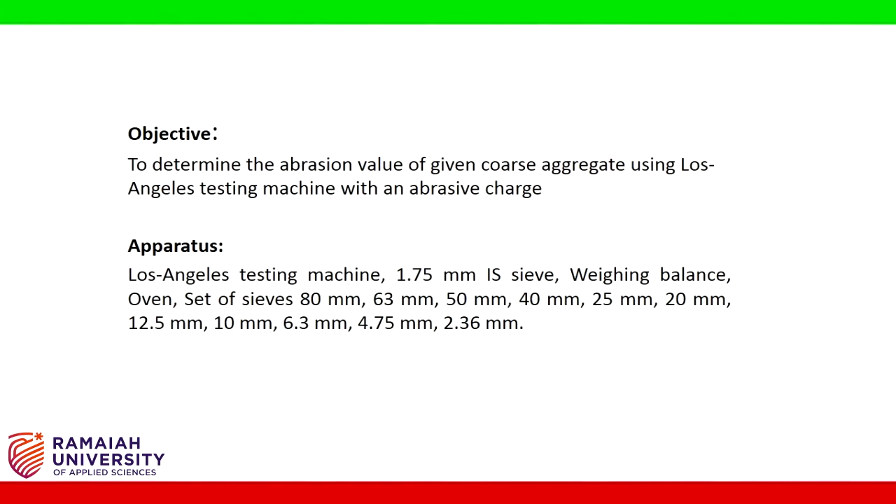2.36 mm. The principle of the Los Angeles abrasion test is to find the percentage wear due to the relative rubbing action between the aggregate and the steel balls used as abrasive charge. Pounding action of these balls also exists while conducting the test.

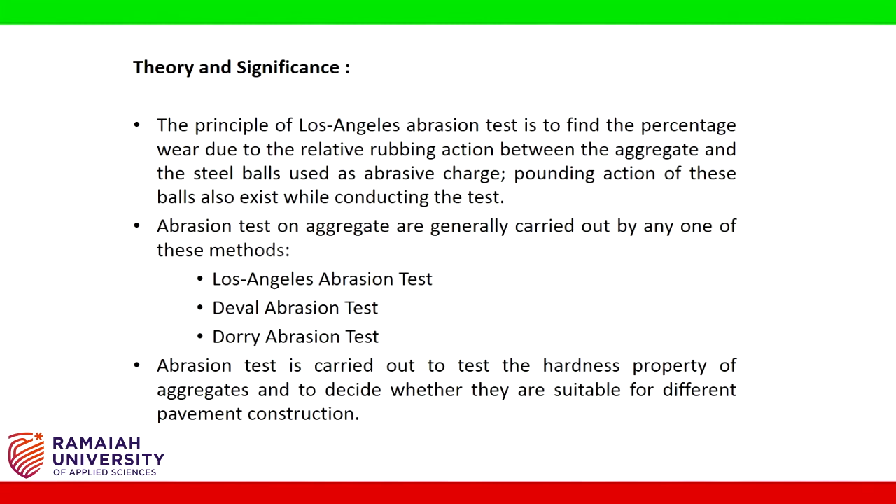Abrasion tests on aggregate are generally carried out by any one of these methods: Los Angeles abrasion test, Deval abrasion test, Dorry abrasion test. The abrasion test is carried out to test the hardness property of aggregates and to decide whether they are suitable for different pavement construction.

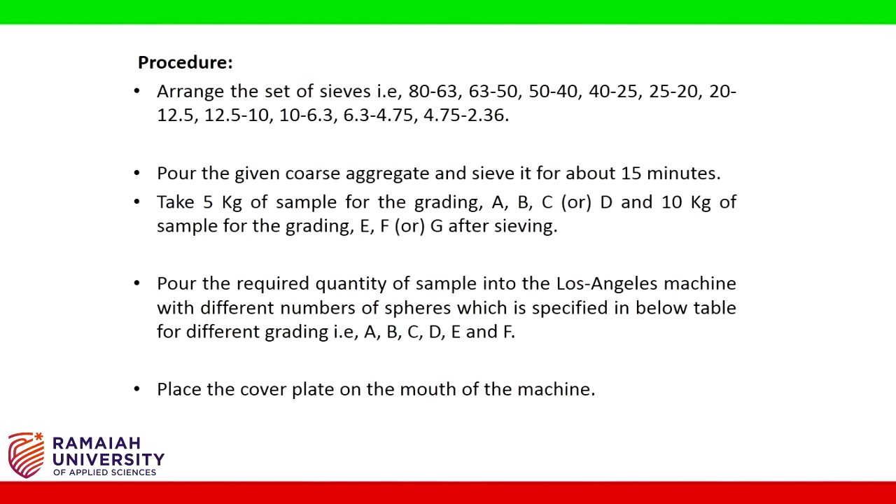Pour the required quantity of sample into the Los Angeles machine with the different number of spheres specified in the table below for different gradings, that is A, B, C, D, E and F. Place the cover plate on the mouth of the machine.

The machine is rotated at a speed of 30 to 33 revolutions per minute, for 500 revolutions for grading A, B, C or D, and 1000 revolutions for grading E, F or G. At the completion of the required revolutions, discharge the material carefully from the machine into a tray.

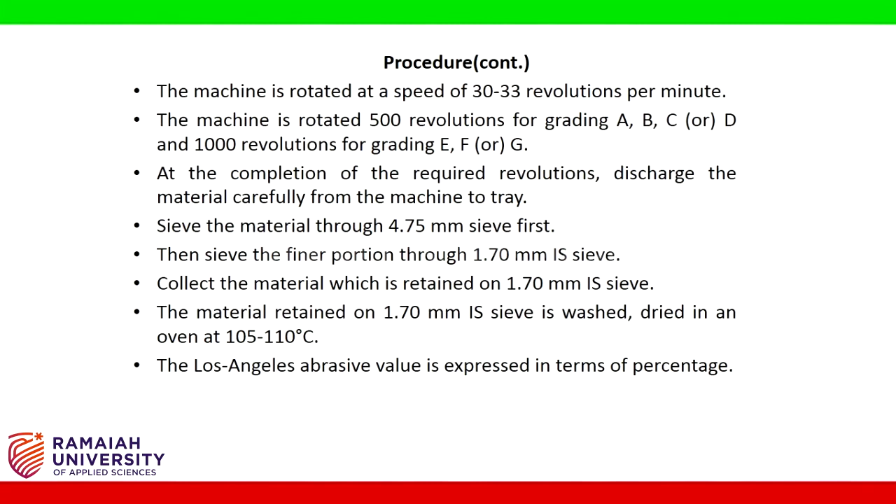Sieve the material through a 4.75 mm sieve first, then sieve the finer portion through a 1.7 mm IS sieve. Collect the material retained on the 1.7 mm IS sieve. This material is washed and dried in an oven at 105 to 110 degrees Celsius.

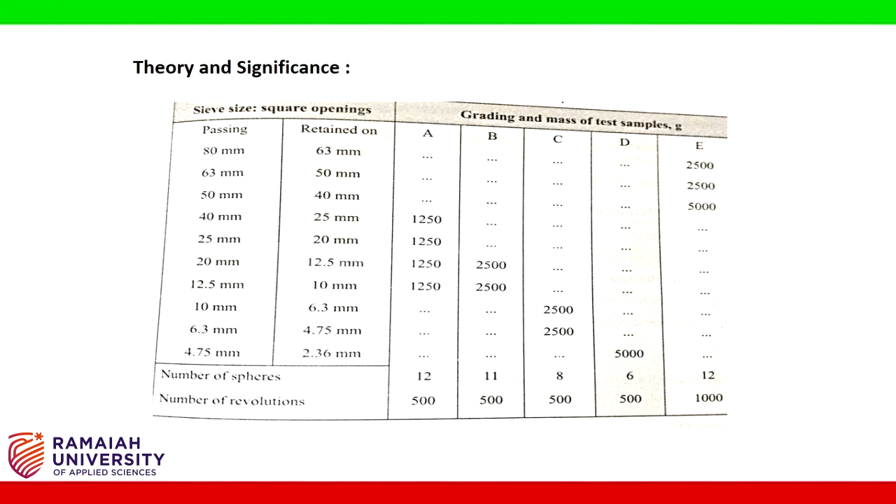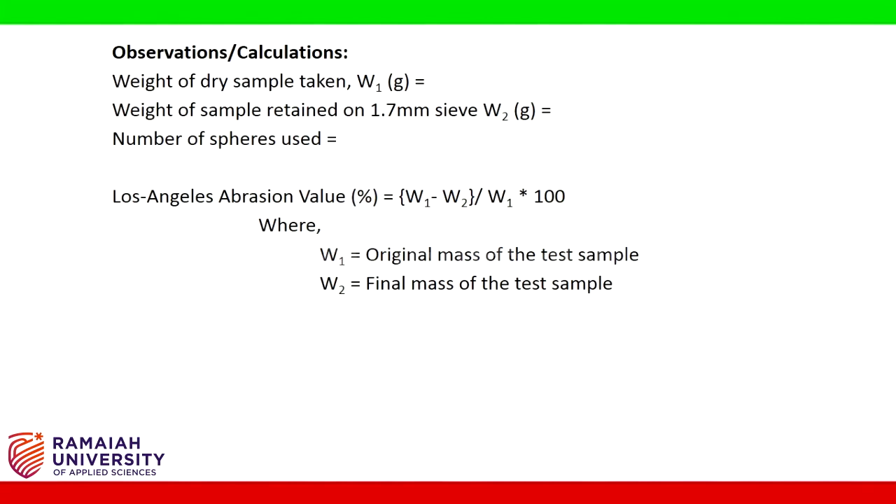The Los Angeles abrasive value is expressed in terms of percentage. Observations and calculations are made in terms of weight of dry sample taken, weight of sample retained on the 1.7 mm sieve, number of spheres used, and the Los Angeles abrasion value in percentage.

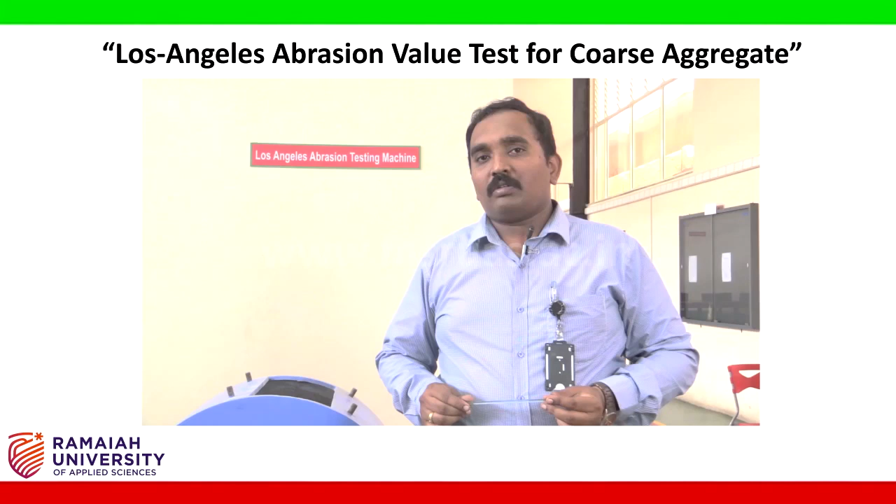Hi students, today we are discussing an experiment on abrasion testing of aggregate. So what do you mean by abrasion? The wear and tear action of the aggregates, we call it abrasion.

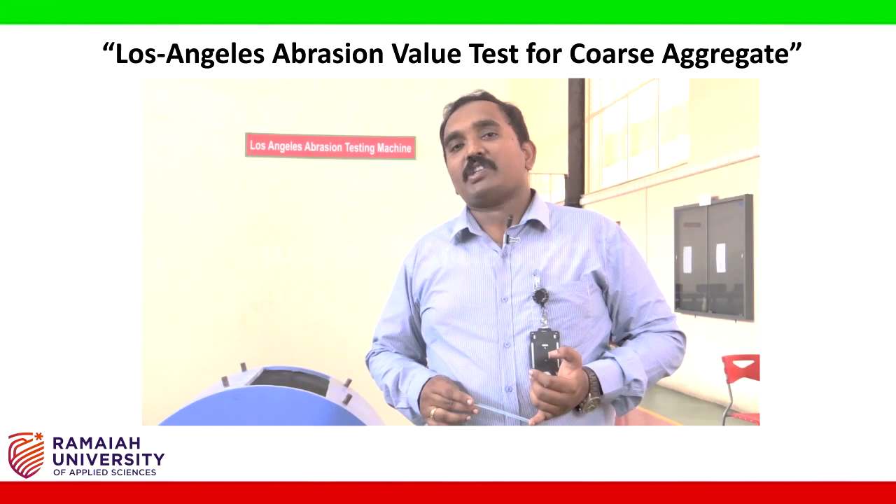As per standard practice, there are 3 methods of doing the abrasion test on aggregates. The first method is the Deval's abrasion testing machine, the second is the Dorry's abrasion testing machine, and the third is the Los Angeles abrasion testing machine. Let us look at all 3 types of abrasion testing machines and I will tell you which is the standard method and how to do it.

So as we discussed, this is the first method, called the Deval's abrasion testing machine.

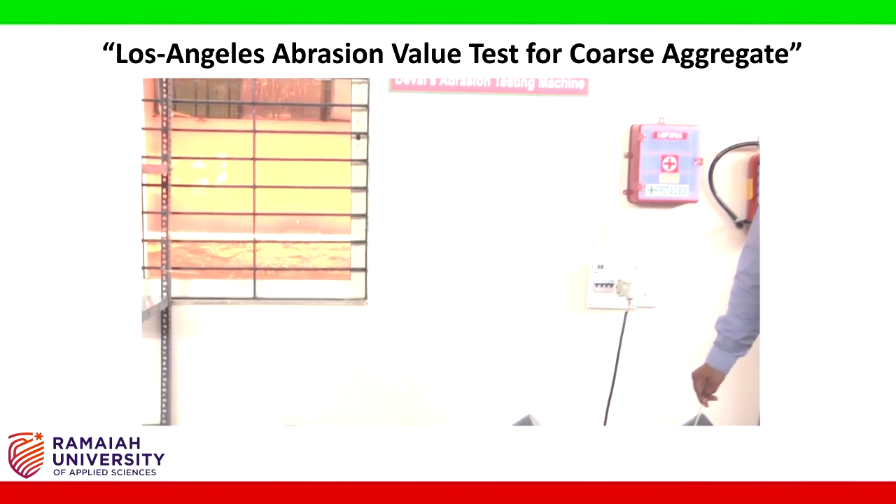So this is the second equipment, called the Dorry's abrasion testing machine.

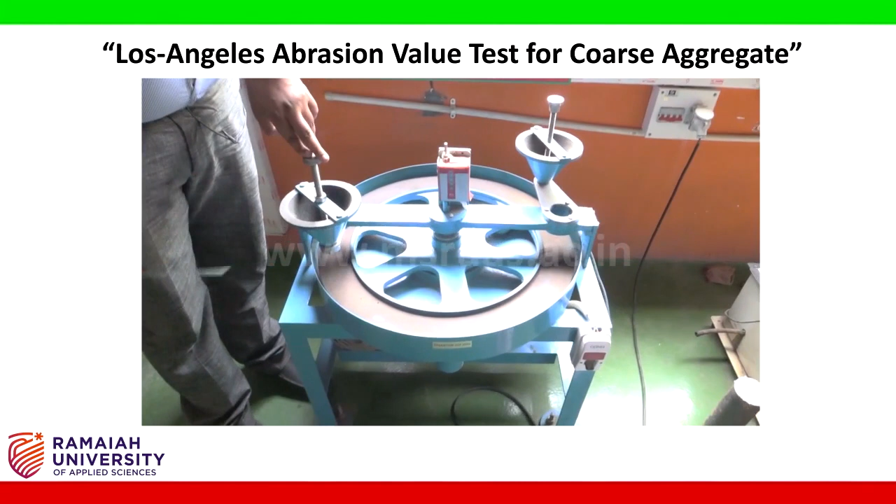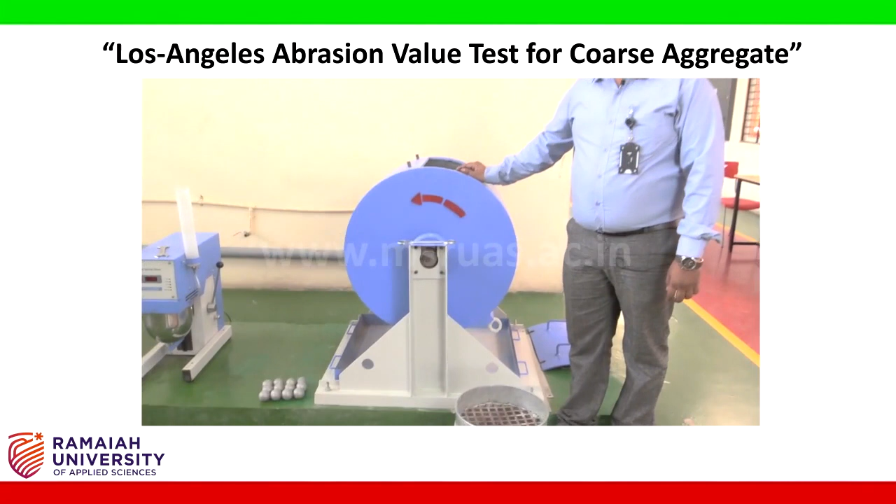The third experiment, the Los Angeles abrasion testing machine, is the standard method we are going to use in the laboratory today. So let me explain the apparatus required for doing this particular experiment.

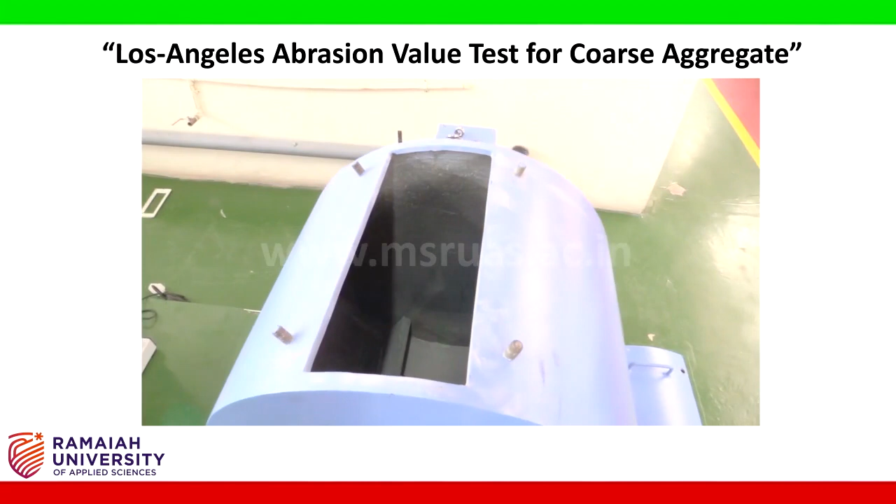This is what we call the Los Angeles testing machine. It has a cylindrical drum with one open lid, and if you keenly observe, it has a diameter of 0.7 meters,

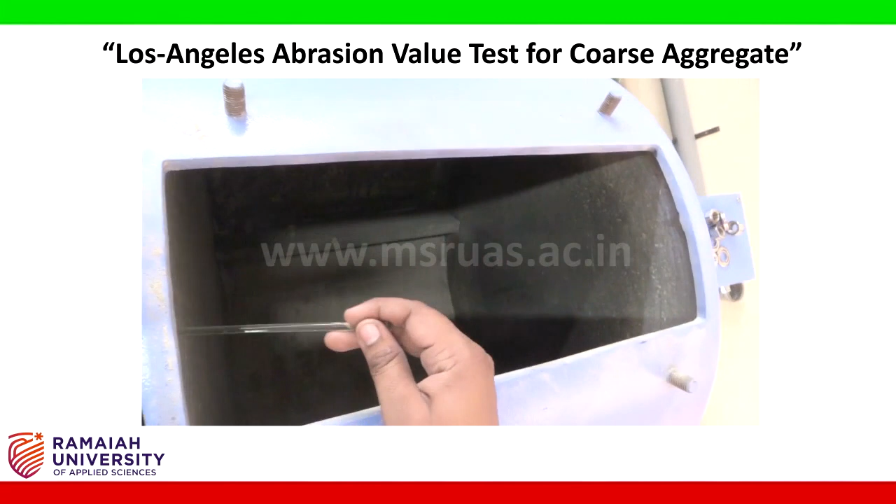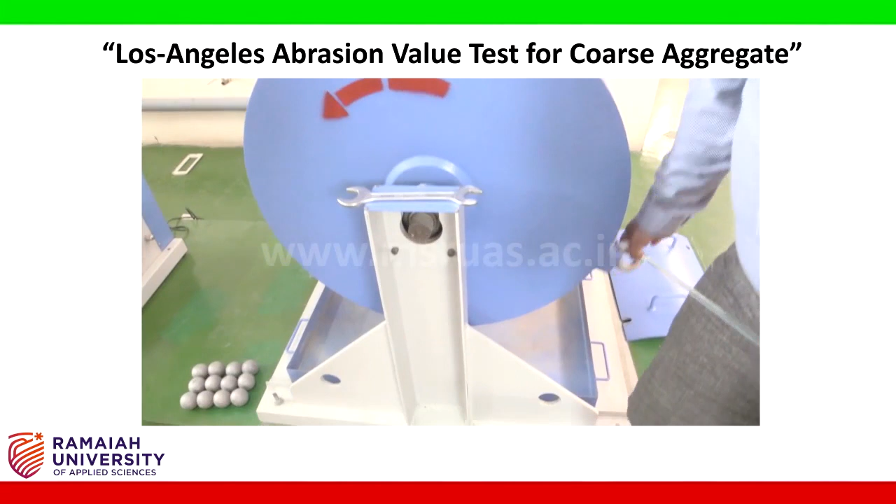and it is capable of revolving in the anti-clockwise direction. You can revolve this in the anti-clockwise direction.

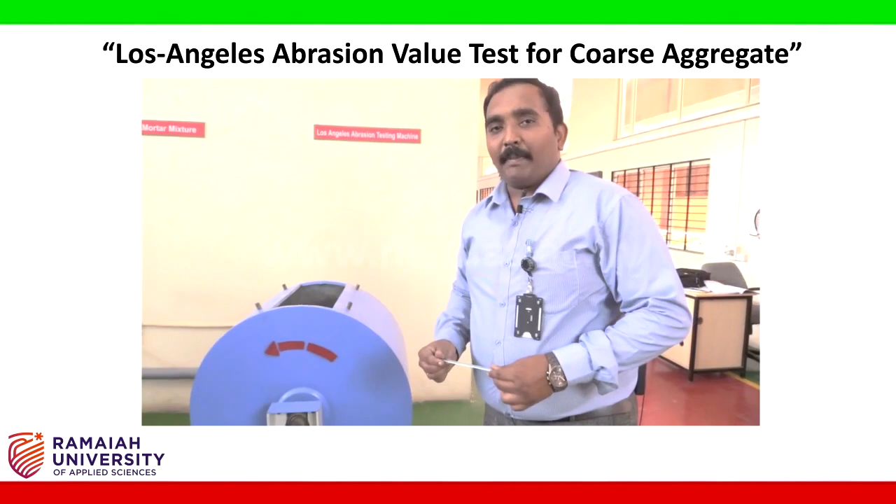Coming to the apparatus required, we require IS standard sieves of size 20 mm, 12.5 mm, 10 mm, 1.7 mm, and pan.

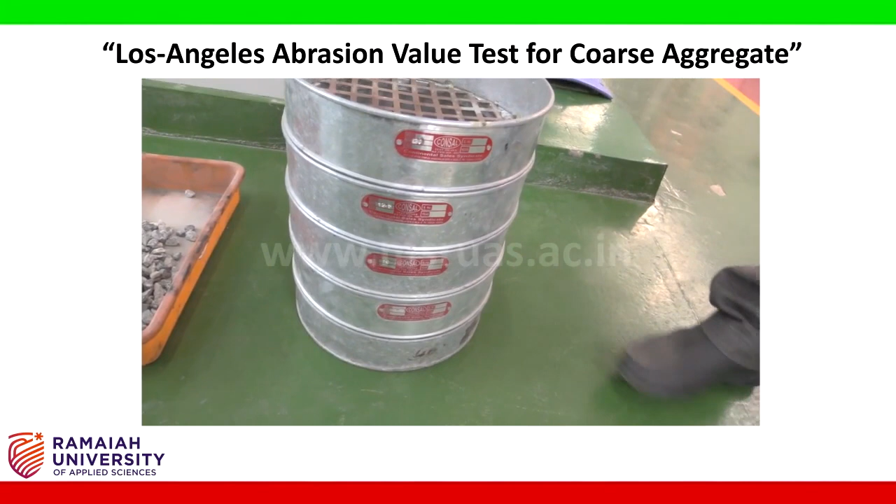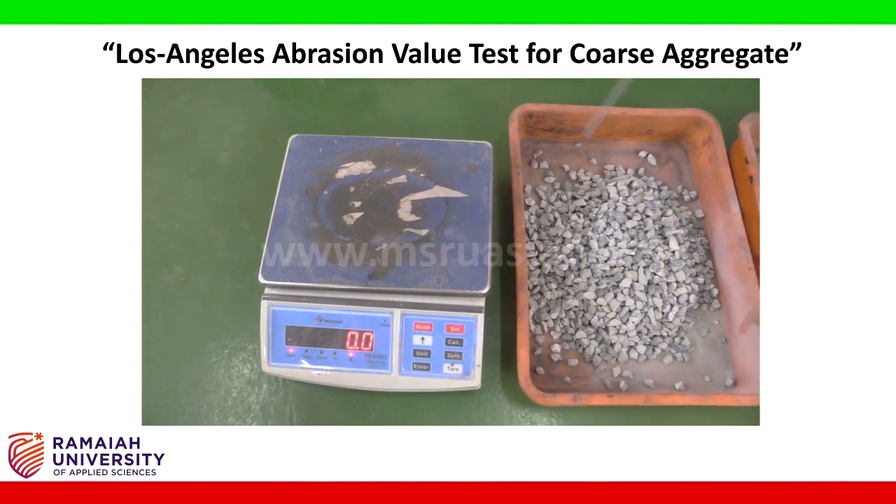Along with that, we want a weigh balance of 1 gram accuracy, and the aggregate portion: 2.5 kg passing 12.5 and retained on 10, and 2.5 kg more passing 20 and retained on 12.5 mm.

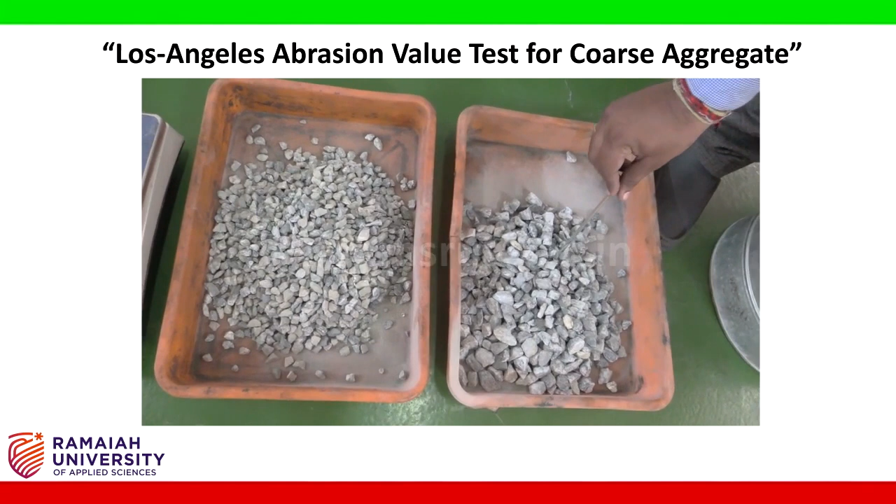This test is a simulation of a field test where, when we apply the brakes, the top surface of a bituminous layer or concrete layer undergoes wear and tear.

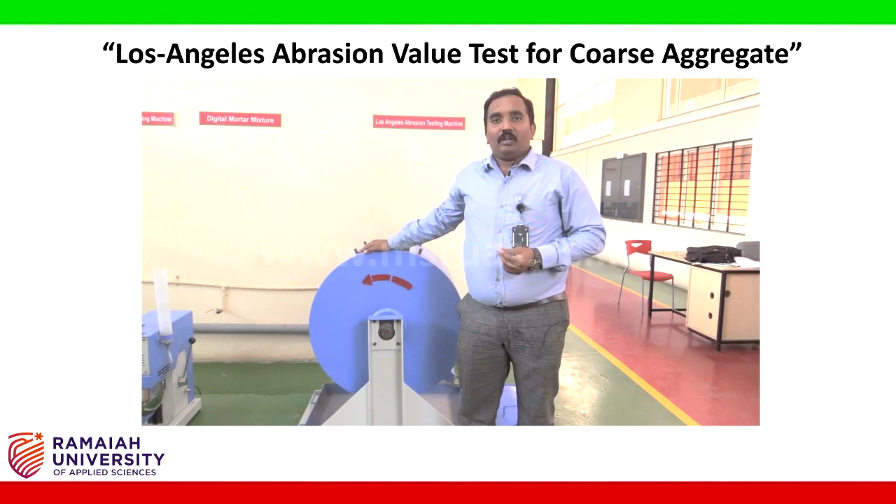This test can be done for any aggregate size starting from 63 mm till 6.3 mm. Whatever I am doing today is for a standard size.

If I just talk about the grades, we have grades from A to E. What does this A to E grade mean? Grade A will be having 63 mm down aggregate. Like this, for the variation of sizes, the grades are given from A to E.

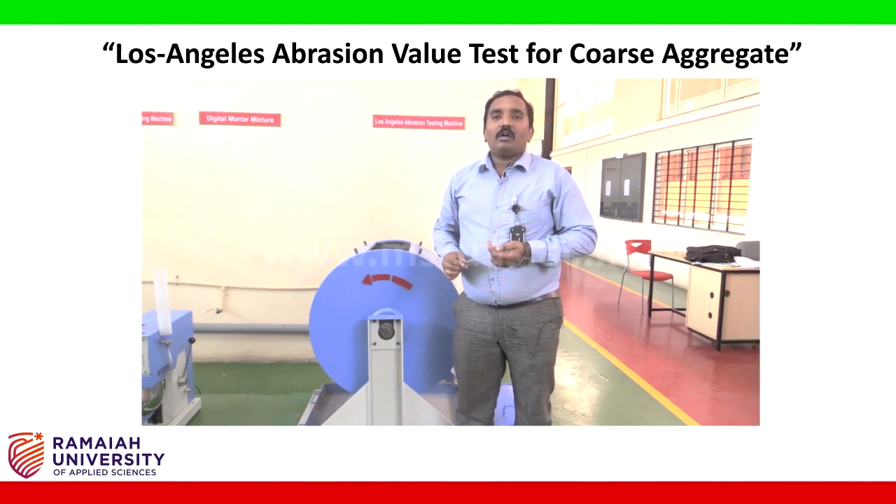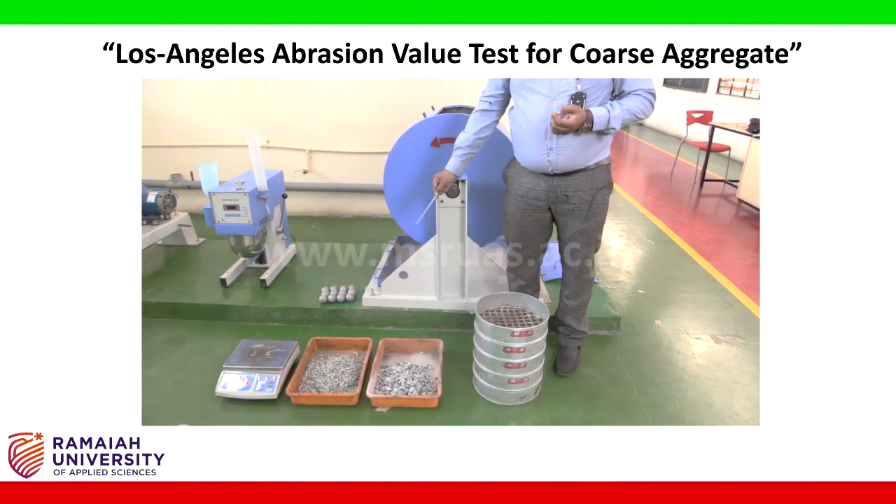What I am doing today is grade B, where I have taken 2.5 kgs of aggregate passing 20 retained on 12.5, and 2.5 more kgs of aggregate passing 12.5 and retained on 10. So to simulate the field condition, we are going to add a surcharge in the form of iron spheres.

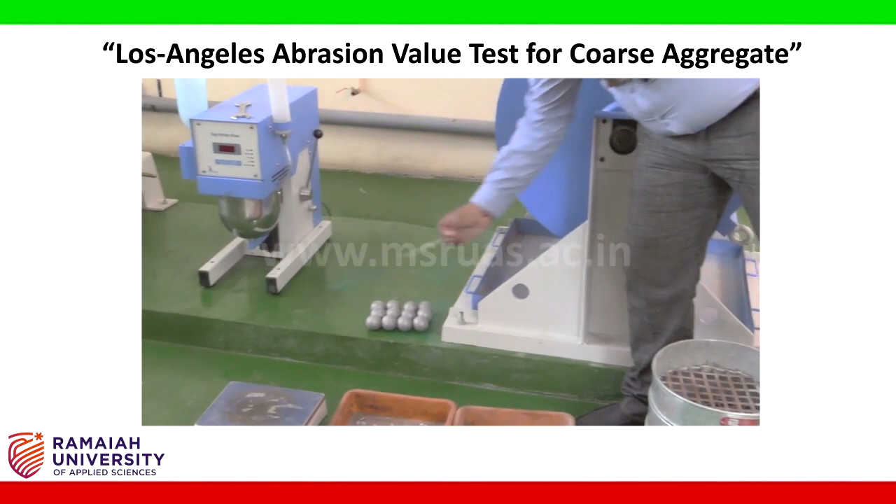These are the iron spheres I am talking about. For different grades, I am going to add different numbers of abrasive charges into the drum.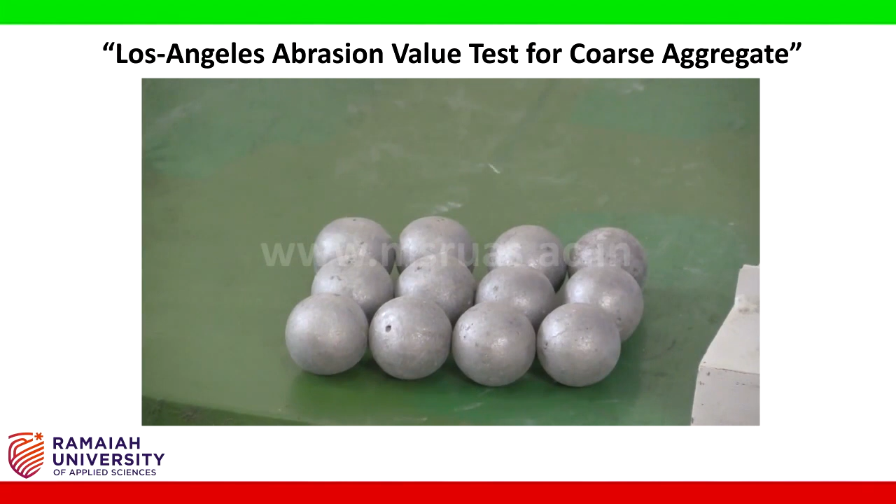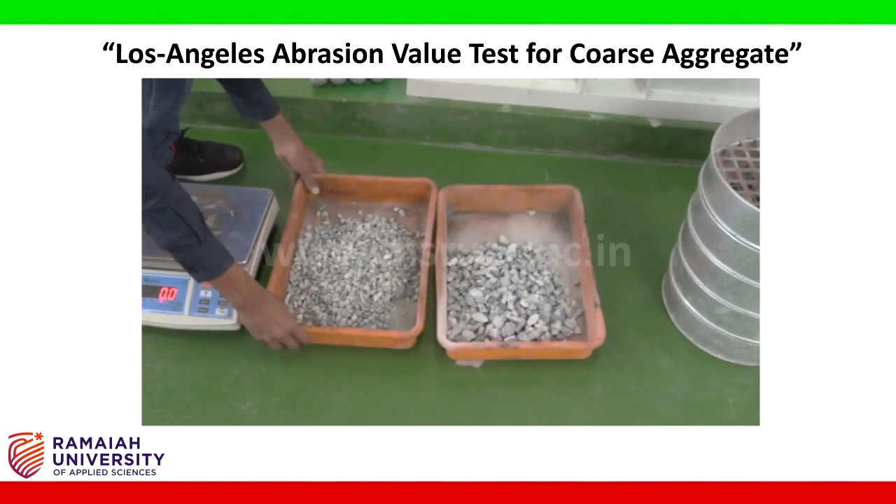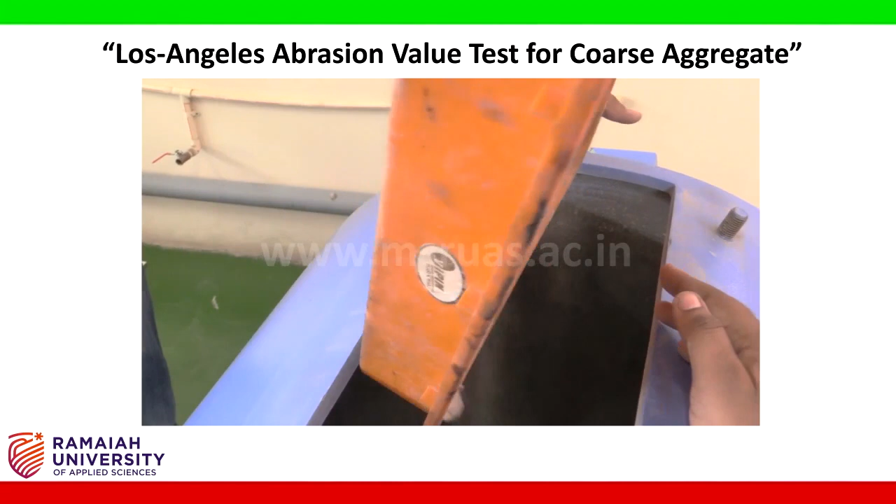Coming to the experimental conduction, we are going to add 2.5 kgs of aggregate passing 12.5 retained on 10 onto the drum, and also aggregate passing 20 retained on 12.5, another 2.5 kgs, into the drum.

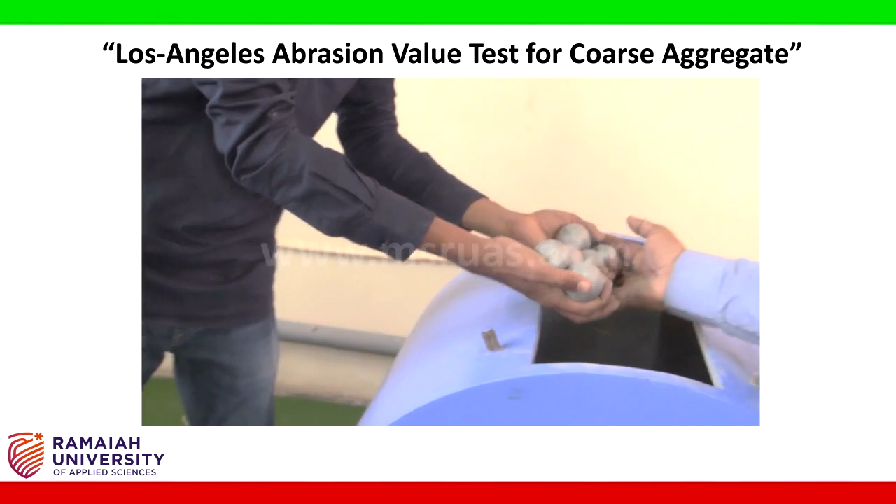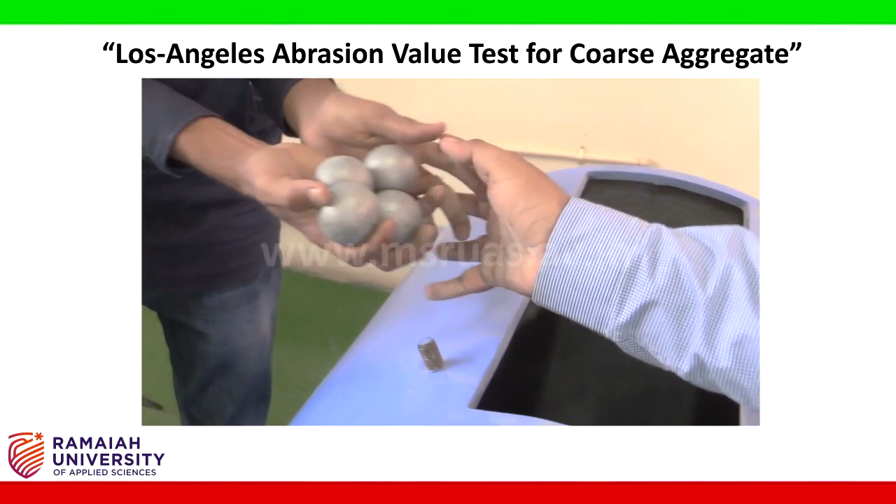As I discussed, we are doing this for grade B. If I refer to the standard chart, I need to add 11 surcharge weights: 3 plus 4 is 7, plus 4 is 11. I am adding 11 surcharge weights into the drum to create the field condition.

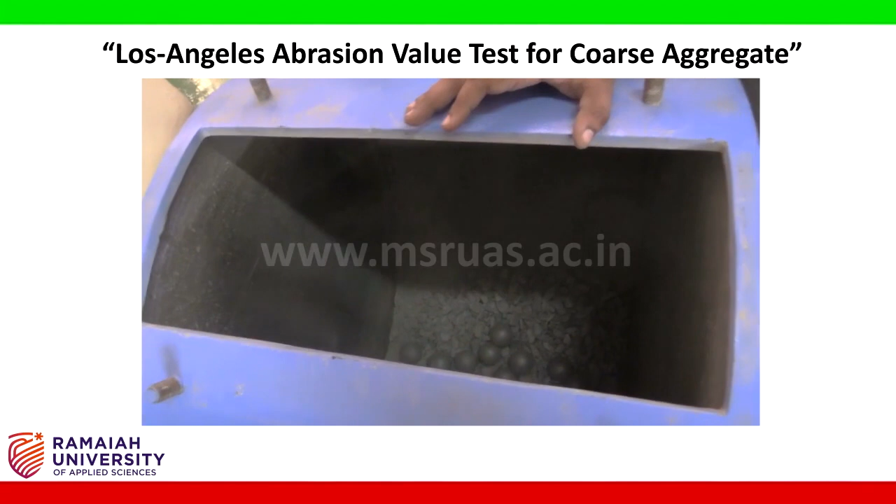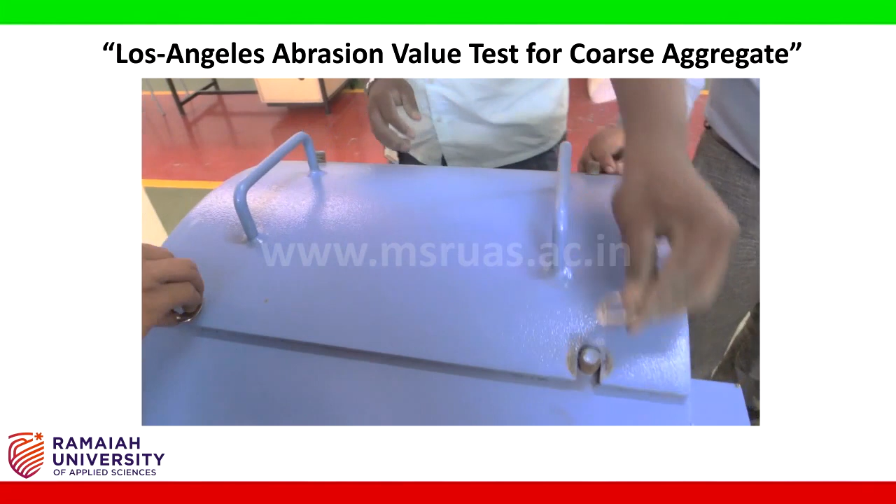After adding the surcharge weight, I am going to close the lid of this abrasion testing machine. We are just going to bolt it with the help of washers so that no dust should come out of the drum.

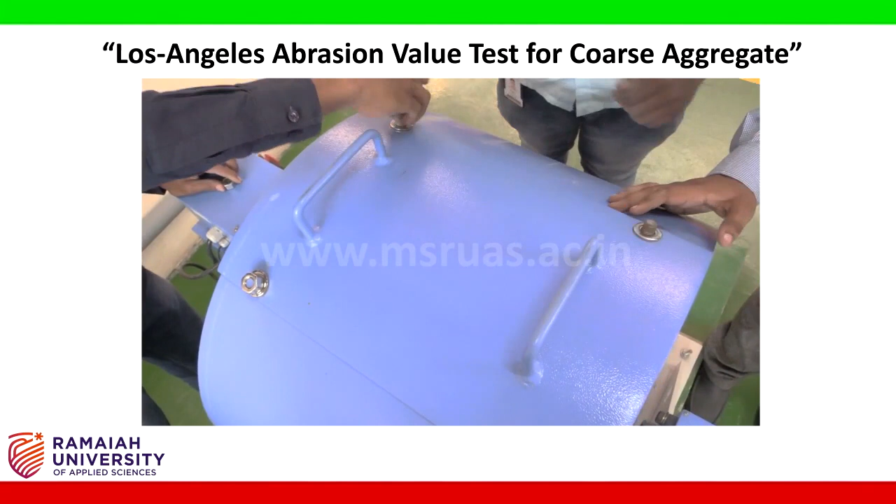Tighten this completely so that none of the dust particles escape out of the drum.

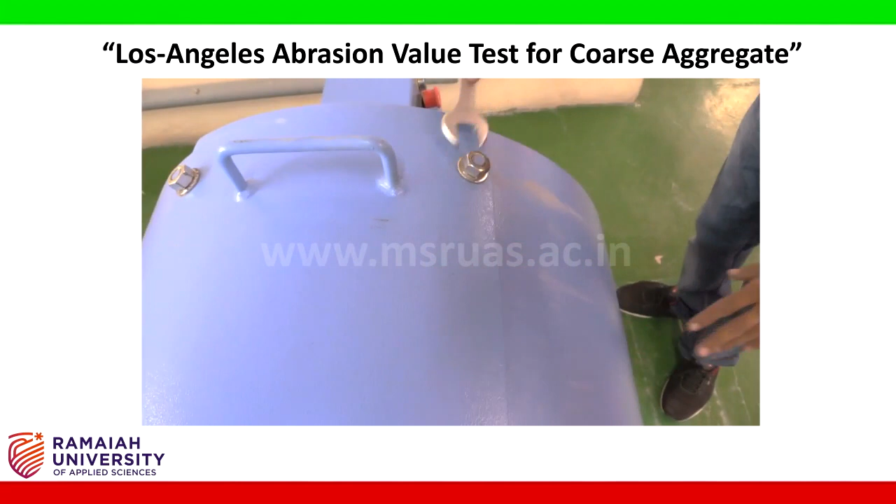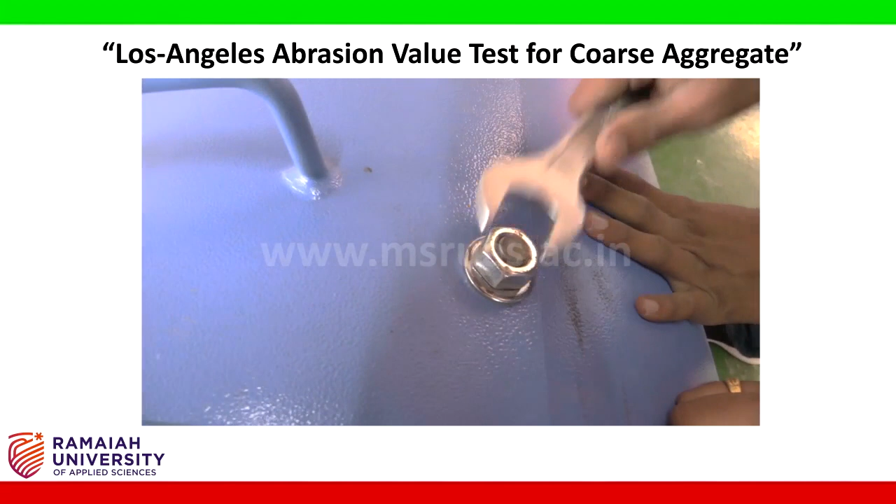Now the system is ready for the testing process.

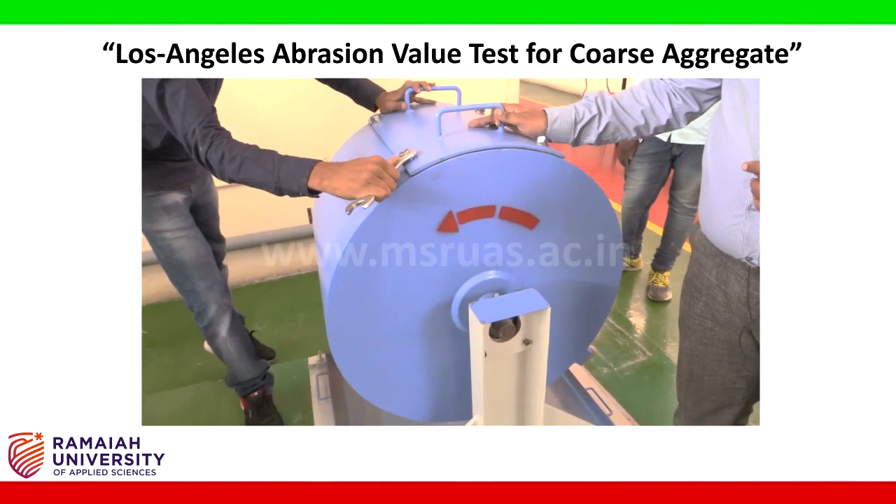What we are going to do is create the field simulation. For this, the drum has to start revolving, so we are going to fix a constant RPM of 30 to 33 revolutions per minute.

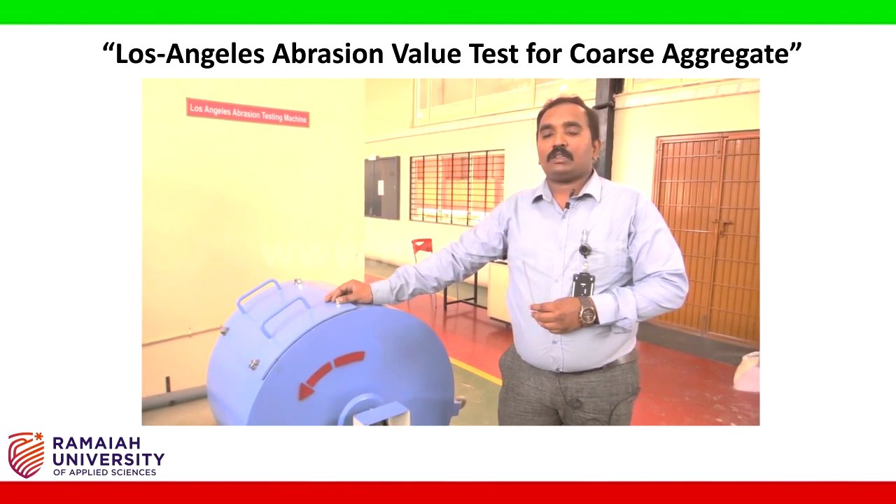For 500 revolutions, we should operate this particular movement.

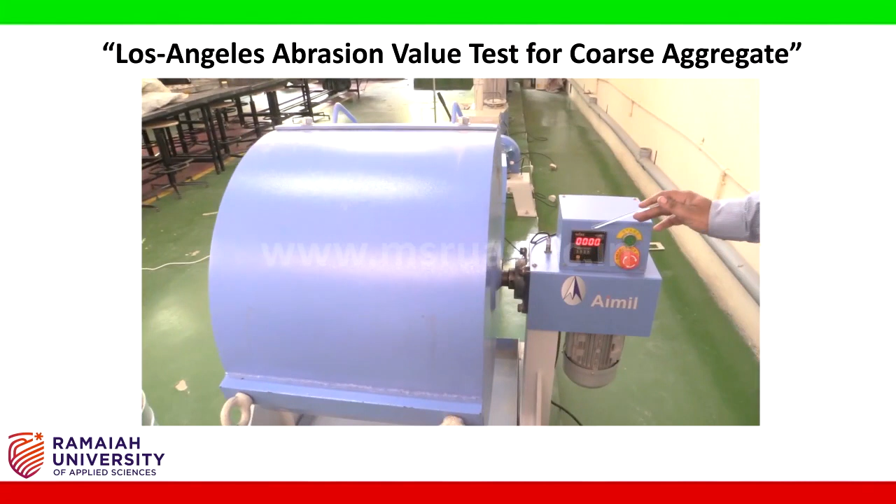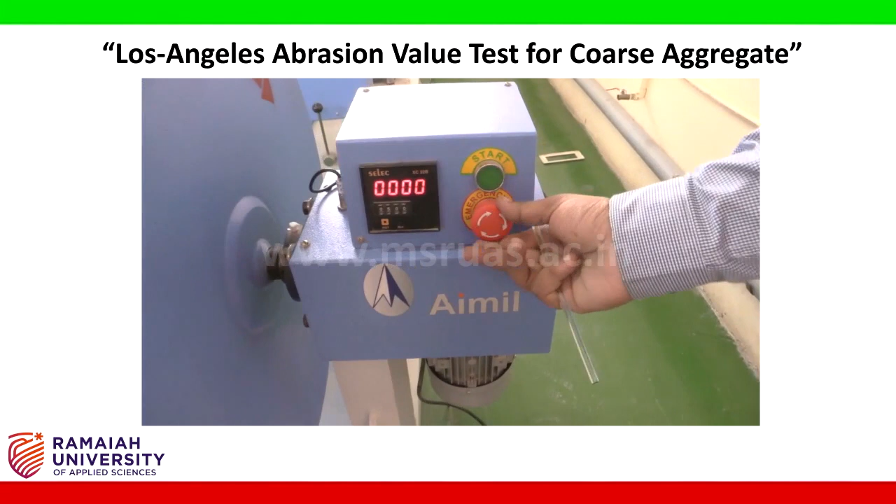Coming to the setup, here we have the control on and off switches. Onto this we have a control panel, like what you observed in the other equipment. We have an emergency button, a stop button, and a start button.

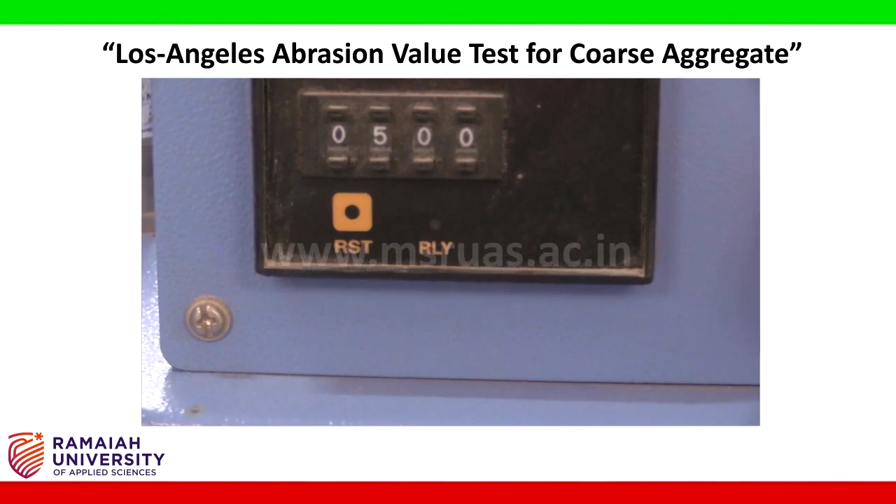As I told you, we are supposed to do it for 500 revolutions. I fixed the 500 revolutions manually over here, and I'm going to start the machine.

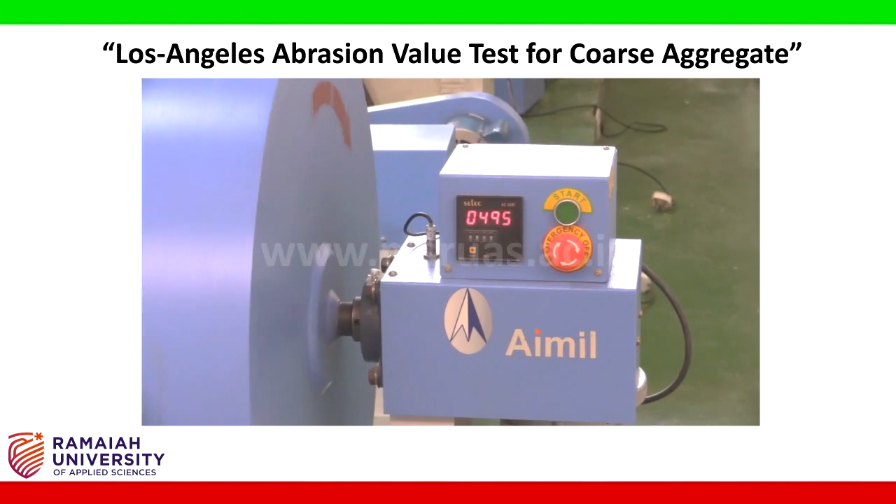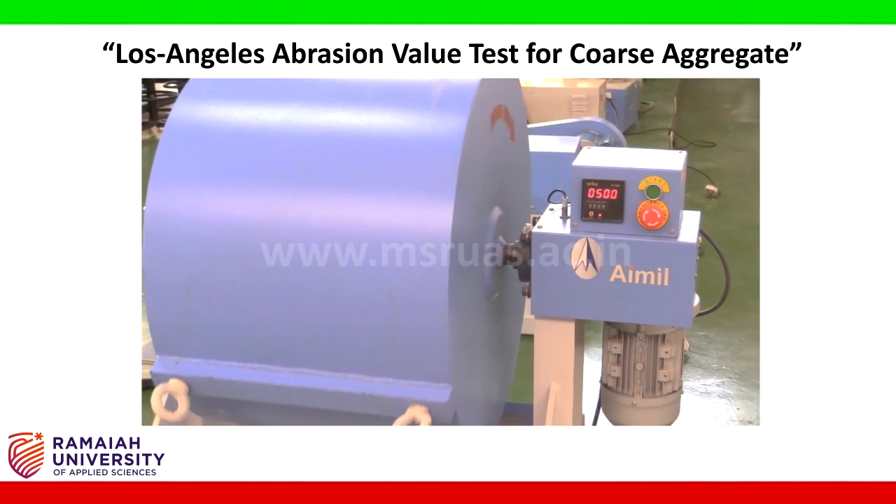After completing 500 revolutions, we are going to wait for a minute and then remove the shutter of the drum.

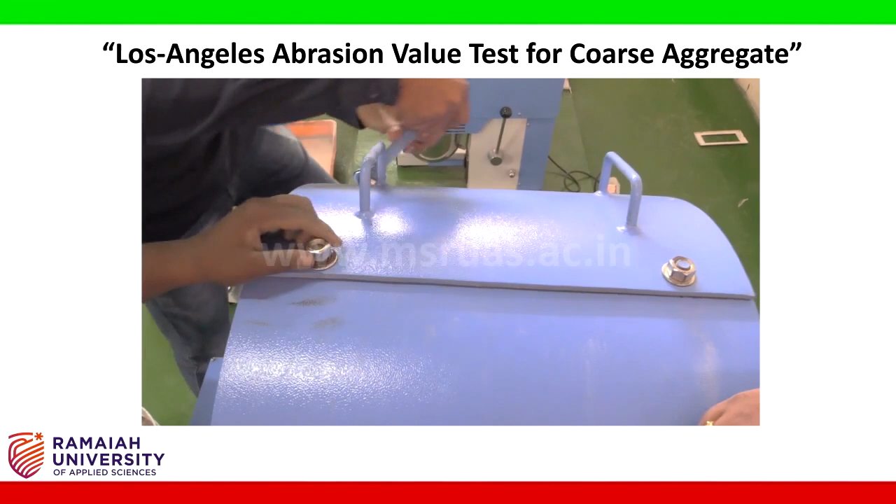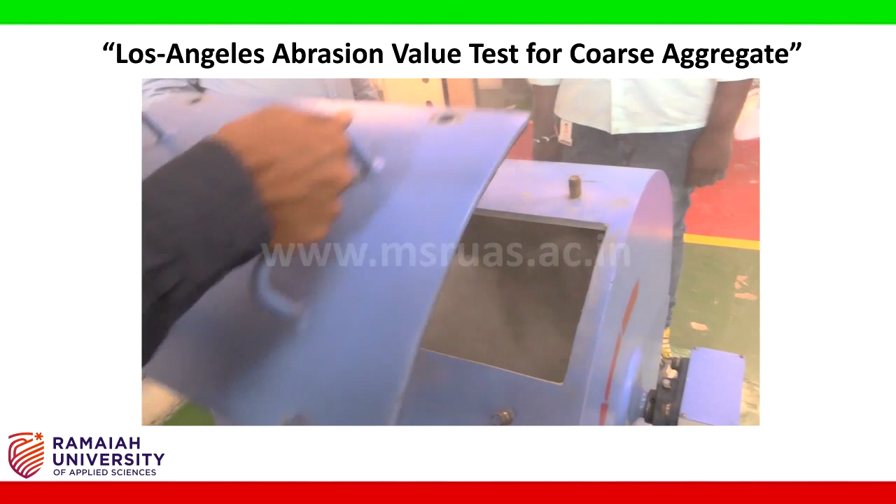We are going to unload all the mix inside the drum onto the tray.

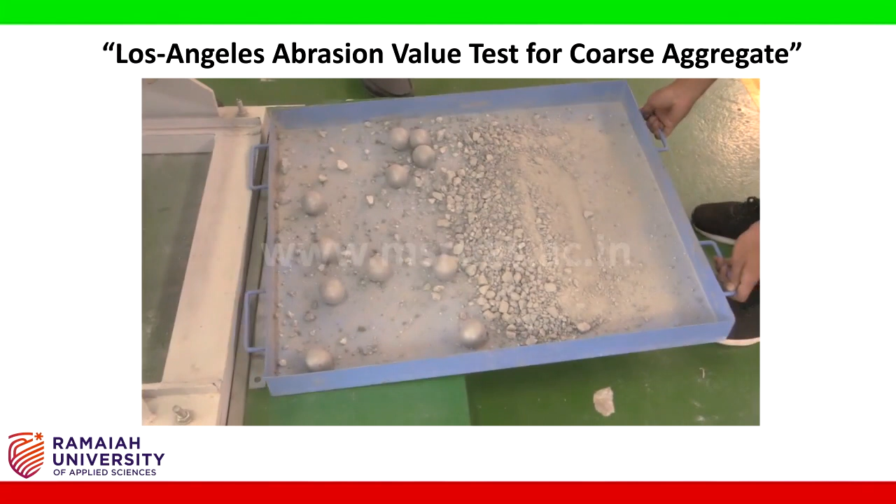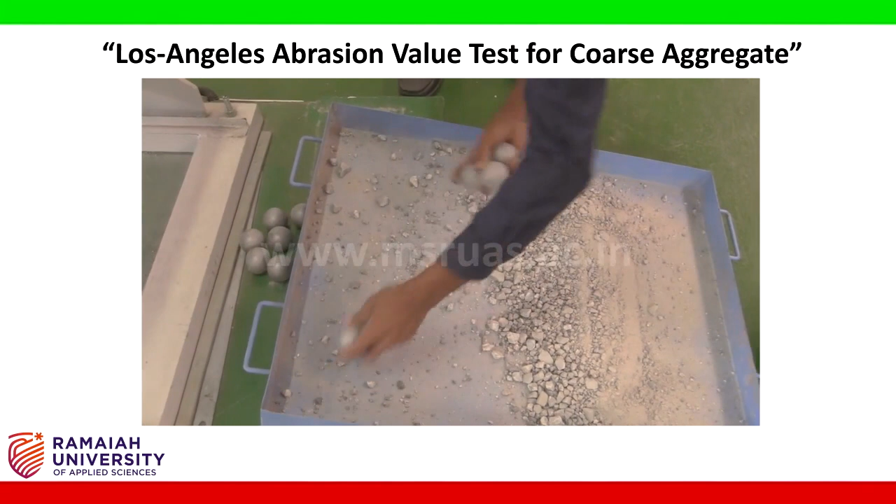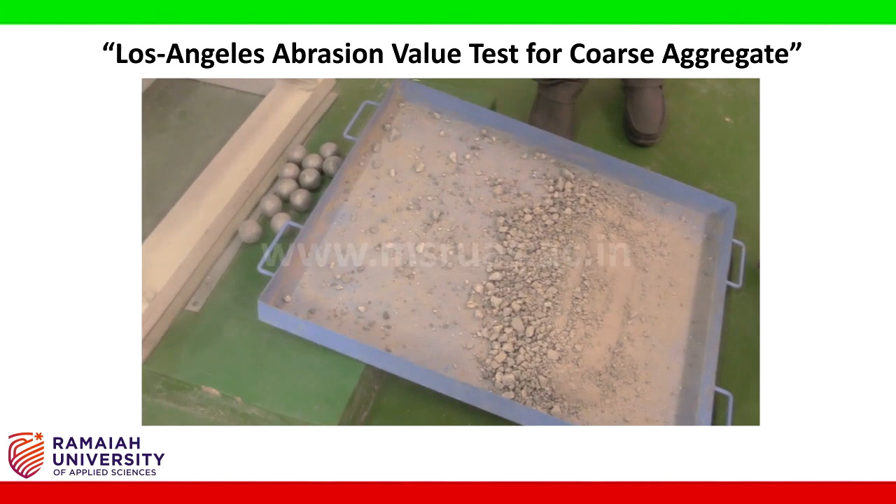The mix we obtain is sieved through a 1.7 mm sieve. The weight retained on the 1.7 mm sieve will be noted.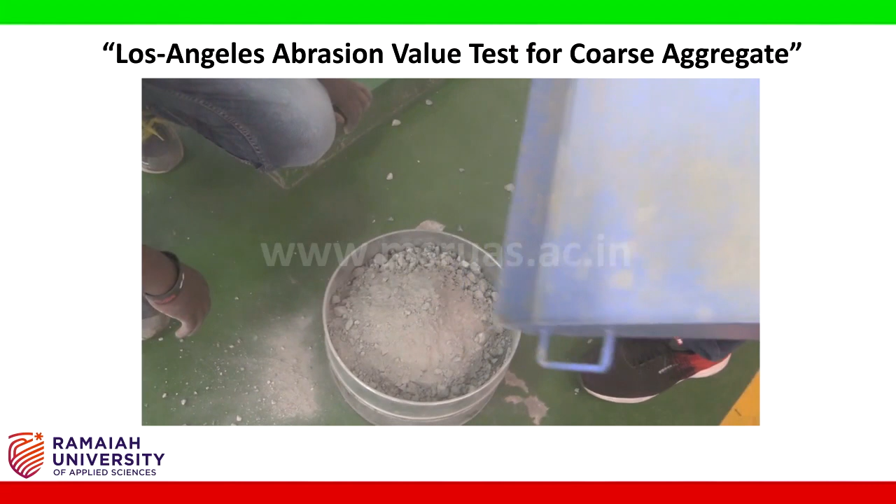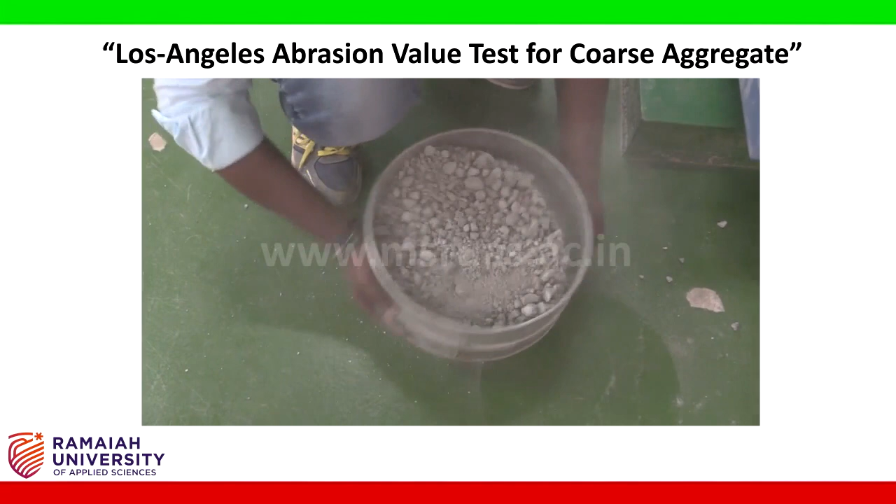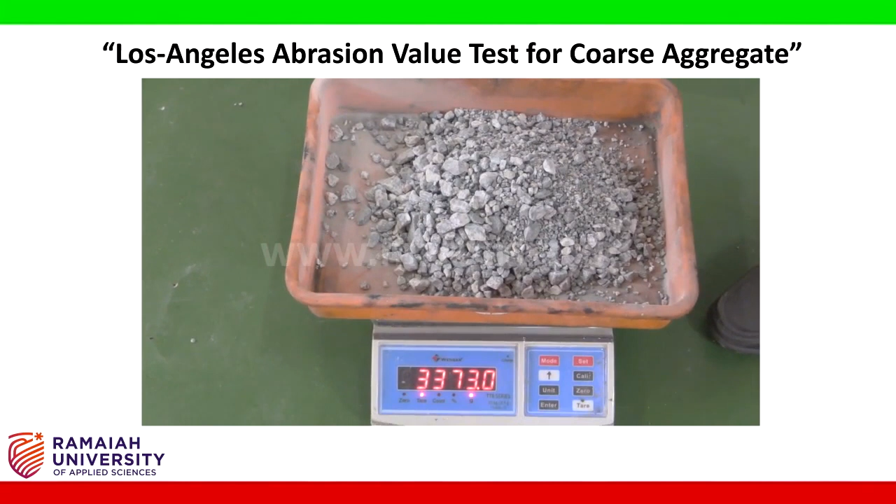The weight of aggregate retained on the 1.7 mm sieve is noted down. The ratio of the weight of aggregate passing on the 1.7 mm sieve to the weight of aggregate taken gives you the aggregate abrasion value.

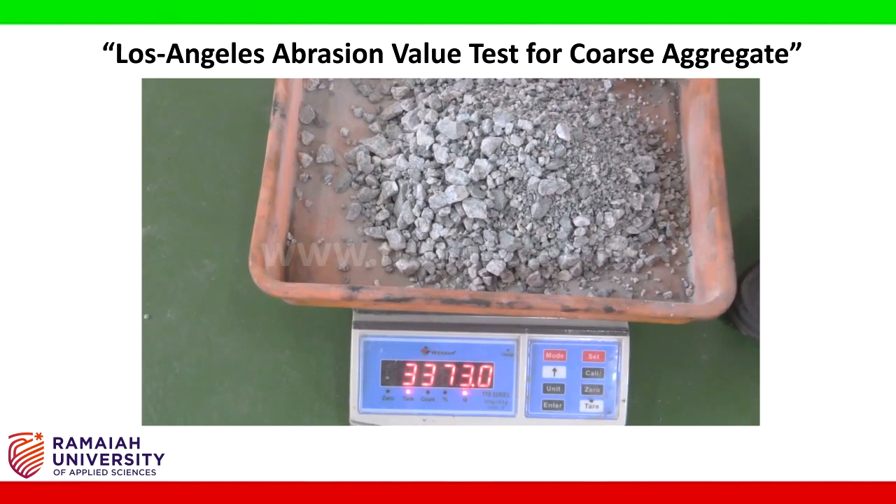If your aggregate is of good quality, that means the wear and tear will be less, and you get a very good abrasion value. If it is more...